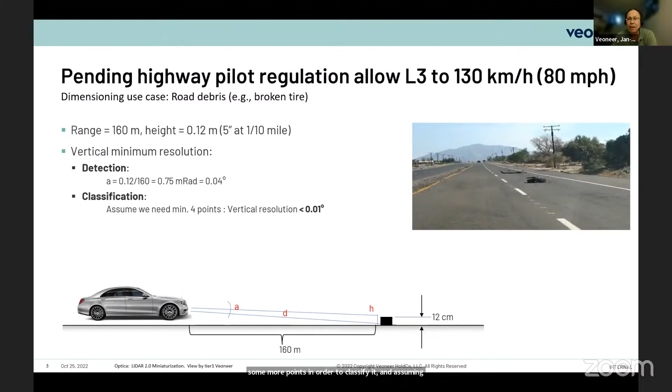Just to compare with what a lot of people are familiar with from the Google car, the early Velodyne has a point separation of 0.9 meters, so you get at most 2 points vertical. This gives some perspective: you need several points on something that is 12 centimeters tall.

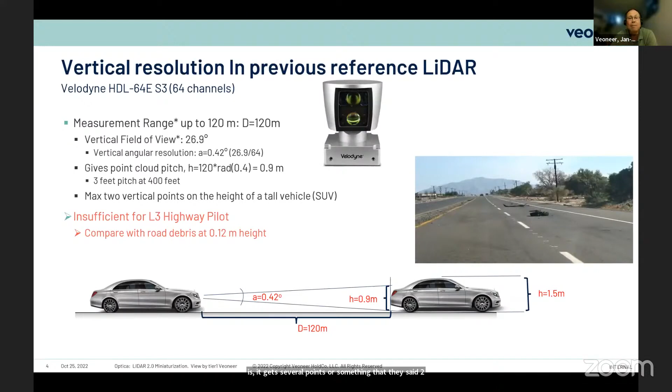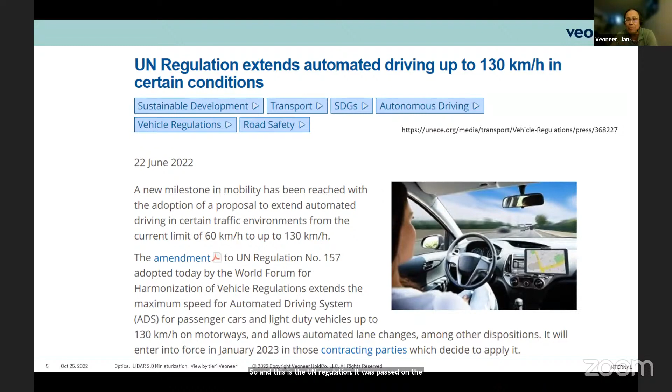This is the UN regulation, passed on the 22nd of June. So if you want to read up more, it actually allows L3 up to 130 kilometers per hour, and I think that gives a lot of the requirements.

The next point is that it also has to work in a lot of different weather conditions, unless we all move to Arizona or other places with very nice weather. This is an example: the left one is driving behind a car on a wet road, and the other is driving behind another car on a snowy road. Rain is usually not the main problem; the problem is the wet road with somebody driving in front of you, but your system has to handle this as well.

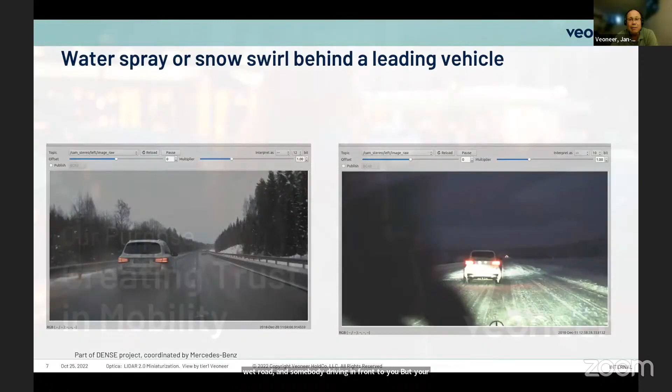This meeting is all about cooperation, so we have a question we ask our guests: what kind of challenges do you have, and what kind of things do you think the rest of the industry here with us today can help you with?

Well, I think that for automotive, the first requirement is cost, the second requirement is cost, and the third requirement is cost, but you always have to fulfill the specifications to solve the problem. You have to be small, use little power, and it has to be possible to package. But unless you fulfill the use case requirements, this automated highway driving is actually a real application coming to cars in the near future, and that means there will be lots of systems requiring these things on the road.

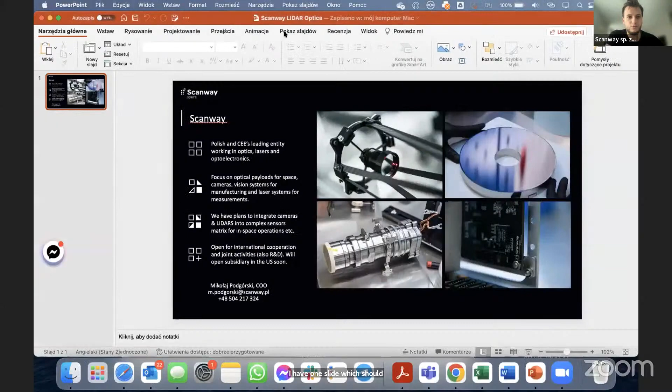Yes, of course, I will share the screen. I have one slide which should clearly say what we are doing and why LiDAR is in our interest. As introduced, my name is Mikołaj, you can call me Nick in English, it might be easier because of the Polish names which are quite complex to pronounce. At Scanway, we are a leading entity in our part of Europe which develops optoelectronic systems for space, and therefore we have lots of interest in LiDAR. Quite recently, you probably all heard about the number of satellites sent to space by Elon Musk and about space debris. We are working right now with our partners to integrate cameras and potentially LiDAR systems into one complex matrix of sensors, which could be used to operate spacecraft and satellites in orbit. So there is a huge market coming for these kinds of systems.

So we are open for any cooperation, for any R&D, not only in space, but also in different, slightly weird areas of industry, like the wind turbine maintenance industry, where we have implemented LiDAR as a quality inspection system of wind turbine blades. So space is one thing, but there is room for LiDARs here in Poland and in Eastern Europe in general.

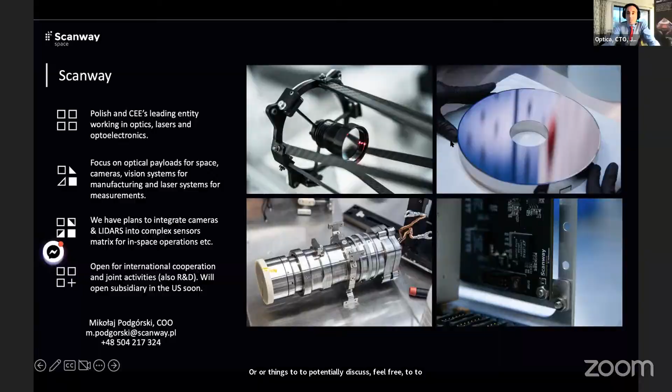Thank you. One thing that I would like to ask the two of you, of course you come from very different market segments. On one hand, we have Veoneer who tell us that the biggest challenge is the cost. Mikołaj, for you, is also the biggest challenge the cost, taking into account that you're going to higher and higher volume production because of the CubeSats?

Well, not necessarily the cost. I would say that the availability of the components right now is the bottleneck, as well as the unstable situation on the markets, which is connected to the geopolitical situation in Europe. It's kind of crazy right now. So both of these aspects will be the key drivers of the company's development in our sector, I guess.

I want to connect these two companies with one other company that means a lot to me, a person that I have been in touch with for many years. This person is from Jabil Optics, Simon Schwaiger. Thank you very much, Simon, for being with us. Jabil Optics, I think all of you know Jabil, one of the largest companies in optomechatronics manufacturing in the world.

Simon, when it comes to LiDAR and hearing the specifications and needs of a company in automotive and a company in space, what do you bring to the table?

Hi, Jose. Nice to meet you here. And you guys, can you hear me? Loud and clear. So I have something I could share, also one slide with you, if that's possible. Yes, please. And while you share it, I would like to remind everyone to please keep your camera on. We really want to see everyone. Emil from Synopsys, great to have you here. All right.

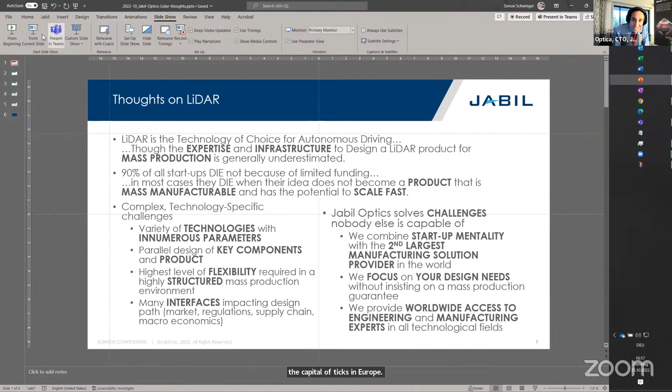Jabil Optics, for those of you who don't know, is in Jena, the capital of optics in Europe. Last week I was in the capital of optics in the US, in Rochester. Can you hear me? Yes, now it's good.

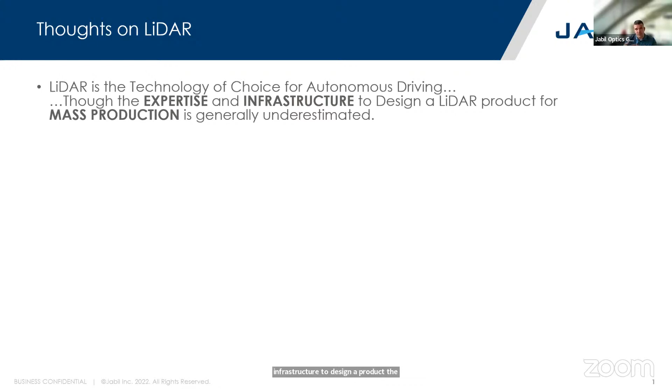All right, so just a few thoughts that we see on LiDAR, and I think we share the view: it's a key technology for autonomous driving. It will be part of the sensor suite enabling this technology. However, what we also see is that the expertise and infrastructure to design a LiDAR product for mass production is underestimated. Why this is the case, I'm going to explain in more detail.

What we also see is that there are a lot of startups involved in this technology, and some already start to fail, and I think there will be more coming. It's not, to our perception, because of limited funding, even though the funding also is sometimes not very substantial. Most of the startups die because they are not capable of coming up with a product that is mass manufacturable and has the potential to scale fast. I think that's also a key topic here.

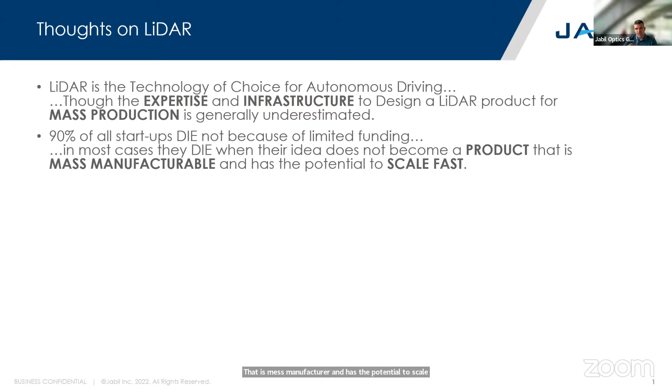And why is that? We tend to say that there are many complex technology-specific challenges. First of all, there are numerous parameters, and the colleague from Veoneer already highlighted some of them, and there are many more, right? Also, a lot of key components are still under development, like MEMS devices that are currently being developed but at the same time being integrated into a LiDAR system. That adds complexity. Plus, during design engineering, you need to maintain a lot of flexibility to adjust to changes throughout the project, and this is very much to the contrary of a highly structured mass production environment.

So this is really a tension that is brought in, and we experience it on a daily basis. Plus the interfaces that have already been mentioned by the colleague from Poland—markets, regulations, supply chain constraints—that adds to the complexity.

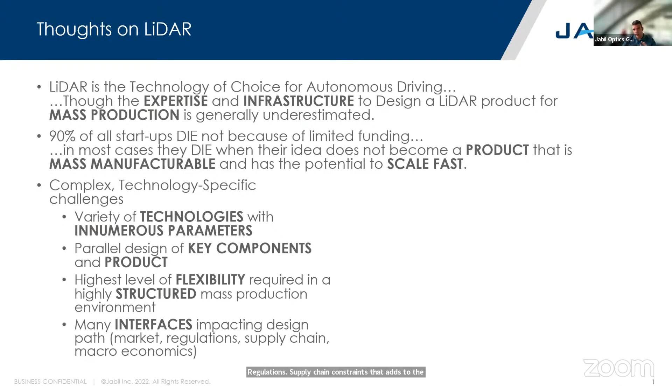And Jose, if you may allow, I think Jabil is in the position to answer these challenges. We have startup mentality. We are the second largest manufacturing provider, 260,000 people, 33 billion in revenue. We focus on design needs. There doesn't need to be an outlook on mass production. We understand it might take a while, but we provide access to engineering and manufacturing experts. We are happy to share and continue to share our thoughts in this call today and afterwards.

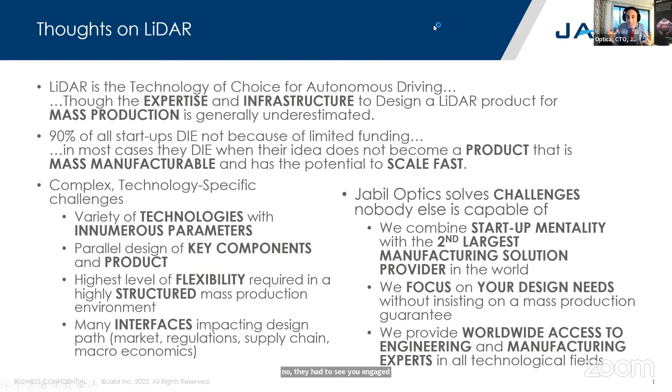Now that I've had you engaged, one of the key questions I want this meeting to try to answer, and I want to go to each of you, Karl-Heinz, Nikolai, and Simon, one after the other: what is the right wavelength that we should target for LiDAR in your particular application? Jan-Erik, Veoneer, what are the current issues with eye safety? What is the recommended wavelength for LiDAR?

Well, there are probably many different opinions about this, but I take the functional hat on here. It has to be eye safe class 1, and it has to fulfill the specifications. If I can do that with, call it, the silicon wavelengths, it's probably cheaper, so that's preferred, but it has to be eye safe and it has to fulfill the specs. I'll outline what I now think is the most relevant dimensioning spec on highway automation. So you won't give me a number, but if you can solve it with a cheaper technology, that's preferred.

Nikolai, where do you stand with wavelength? You are talking about large range LiDAR here, so you don't have a problem with eye safety, but you have a problem with power. Yes, exactly. So there should be a compromise between the power and the range, and basically the quality parameters that we can get from the LiDAR.

In space, as you mentioned, the eyes are not that problematic. We need to be able to have precise measurements up to hundreds of meters, and we don't necessarily have to carry nuclear power on our backpack. So that's very tricky, and that might be the biggest challenge actually, to answer that question and find different solutions, different ideas. For example, we can have a different solution for a small satellite, and a different solution for a bigger satellite, because of the power. So at least for me right now, it's very hard to give you any number. It would be a matter of discussion and some kind of feasibility studies, that's for sure.

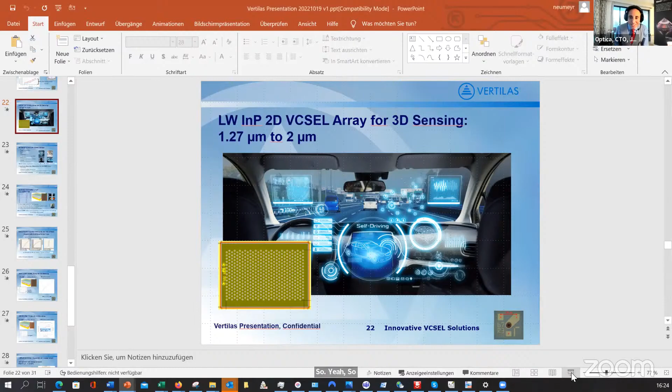So we have a long wavelength VCSEL technology based on indium phosphide. The important part is that we can produce VCSELs from 1.27 micron all the way up to 2 microns. We can do 1.3 micron VCSELs, 1350 nanometer, 1380 nanometer, 1490, 1550, any kind of wavelength. And we have started to produce now 2D VCSEL arrays for 3D sensing and LiDAR applications.

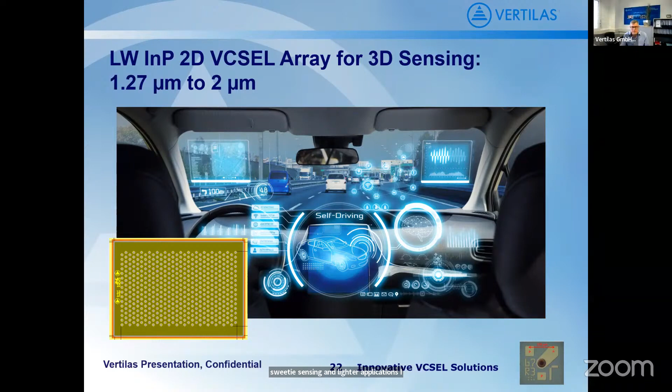I want to show you some examples very quickly. Target applications, you know better than we do. But if you look at the availability of prototypes or 2D array chips we have today, they are at 1.3 micron, starting from a few emitters all the way up to 800 emitters.

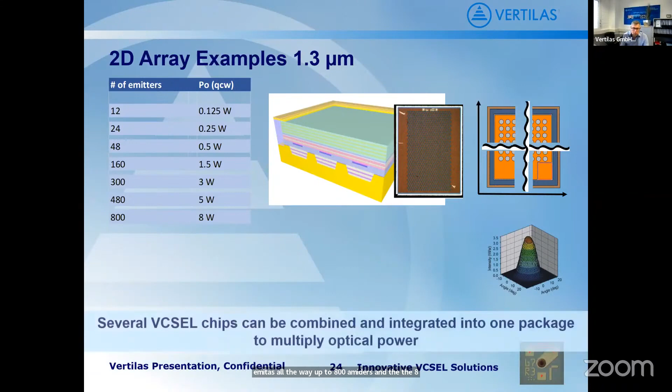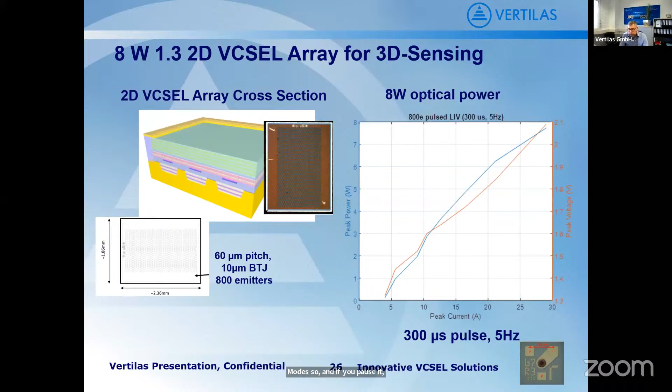And the 800 emitter device produces up to 8 watts in QCW mode, and if you pulse it, you get a multiple of optical power. Another example is a 300 emitter array, which produces about 3 watts of optical power in QCW, and if you pulse it with a 200 nanosecond pulse, you get almost 5 times as much. And if you reduce those pulses even more, you get even more optical power out of it.

As I said, we can do the 1.3 micron, like 1380 nanometer, which is probably the best to work with sunlight interference in open space. But we can have any kind of wavelength between 1.3 and 2 micron, and we can structure from a few milliwatts up to tens of watts of optical power integrated on one chip. And if you need even more power, you can integrate even more emitters on one chip, or integrate several VCSEL chips in one package.

You get 14 watts of power at 1.3 microns? Yeah, and this is only a 300 emitter device. The other one is an 800 emitter, which has about 8 or almost 10 watts peak power at QCW, and with a 200 nanosecond pulse you get like 30 to 40 watts in that range.

This has resonated with two people in the room. First, Sabir from Patience Consulting. Sabir, thank you very much for being with us today. What's on your mind? Yeah, I think this is great. I think TRUMPF also released some information recently about indium phosphide, long wavelength VCSELs.

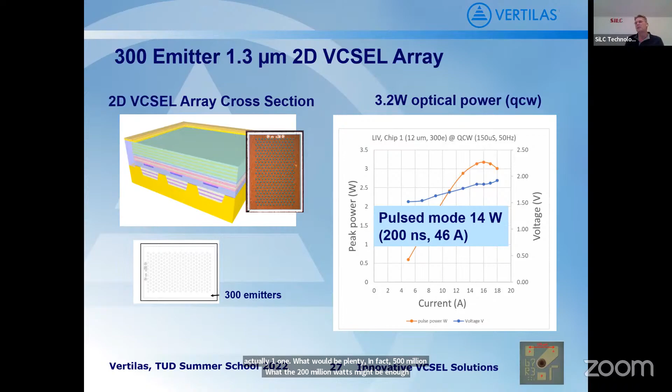Let me see if I can share. Ralph, please go ahead and share the screen. Yes, all right, thanks for having me here.

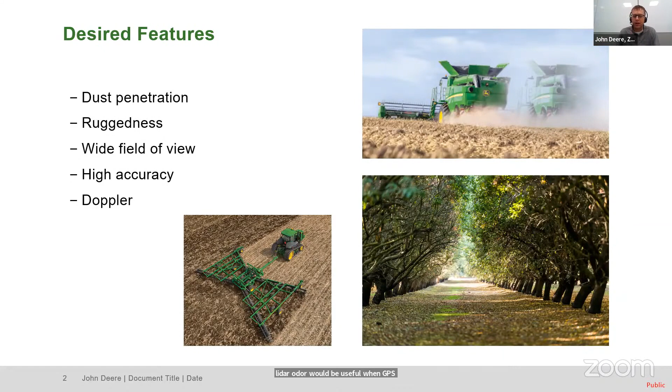Rightfully so, the industry is very focused on the automotive application due to the high volumes. Certainly our volumes are not automotive, but neither are our requirements. So a lot of companies come at us with an automotive pitch, but I'd invite people to stop and think about our environment and our equipment.

Top speed for our equipment is 50 kilometers per hour on the road, and that's not really where our need is—we're not trying to deliver autonomy on the road for ag equipment. It's in the field where our top speed is maybe 25 kilometers per hour. And related to our need for not high speeds, but low speeds, we don't need the highest resolution either.

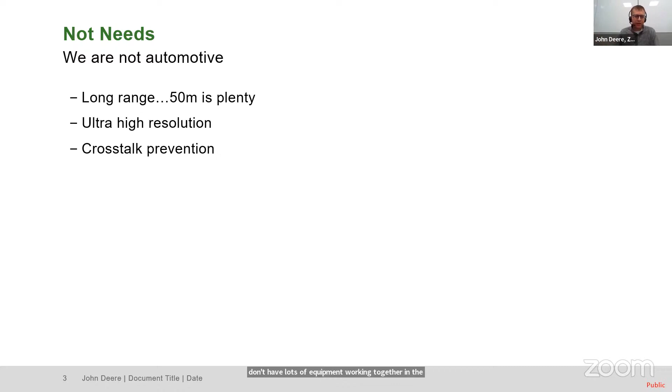From a crosstalk perspective, we don't have lots of equipment working together in the field in concert. And if crosstalk events do happen, the worst thing that could happen is the vehicle would stop, resulting in a small productivity loss. But I think the chances of having a crosstalk incident are pretty slim.

One other thing I'll say is we've got a history of testing LiDARs and other sensors in dust chambers. What we found is that not all LiDARs are created equal, even at that 900 nanometer wavelength. However, we've never experienced a LiDAR that outperformed even a passive camera in a dust chamber. But we haven't given up hope.

In fact, we've invested in the construction of an indoor dust chamber that we plan to have commissioned by the end of the year. So if you're a LiDAR vendor out there interested in serving our needs in the agricultural space, we'd invite you to come in and test with us at our facility in Fargo, North Dakota. Anyway, that's all I've got, Jose.

Thank you very much, I'm really excited about this dust testing that you do. Is this something—when it comes to a LiDAR, I think the most difficult thing is how it would resist not only the light going through the dust, but also the dirt accumulating in the optics. What is the limiting factor of dust in a LiDAR environment?

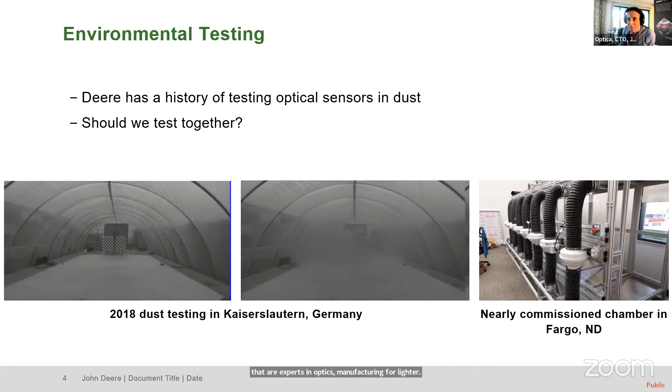Okay, so I have a couple of companies here in the room that are experts in optics manufacturing for LiDAR, so I want to give them the floor. But first I see that Ralph Munster has unmuted his microphone, so maybe he wants to add a comment to this.

No, I apologize, it wasn't intentional, but I certainly have a comment to that. What we missed with coherent is that coherent sensing has the capability to go through dust. There are some nice studies done by Bridge in the past for the Army, where helicopters land in the desert, and when they blow up all that sand there's no visibility, but they've shown you can actually look through the dust with coherent sensing. Just a comment that might be interesting to try out—we've tried it out and seen through smoke and dust pretty well.

I do recommend the use of FMCW LiDAR when it's very dusty, because it's not limited by power, and that is something that helps reject the scattering of light in the dust, Ralph.

Yes, indeed. We have a question in the room coming from a company that is expert in integrated photonics with 3D sensing applications. That company is Anello Photonics. Thank you very much for being with us. Tell us, what's on your mind?

I think we may have lost him. He raised the hand and then he was going out. It's a pity because they do 3D sensing.

Okay, let's go back. I'm sure he will reconnect, but I really have a couple of comments for you, Zach. We really see that there is a need for optics in the LiDAR regime. So I have two companies, one in micro optics and one in larger optics, and I want to see if there is a match with the unmet needs. Let's start with the micro optics.

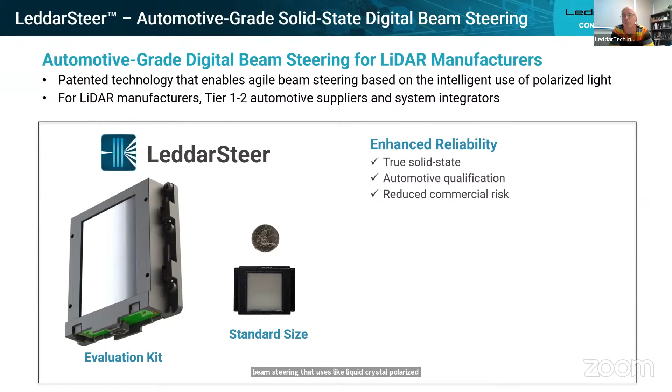What we call our LeddarSteer technology is really automotive grade digital beam steering that uses liquid crystal polarization gratings to provide highly reliable automotive qualified steering. I'm not going to go through this in detail, but the gist is we provide software controlled dynamic beam steering. Importantly, this is compatible with both direct and coherent LiDAR, and can be made in 905 nanometer or 1550. Anybody interested in learning more, just reach out to me.

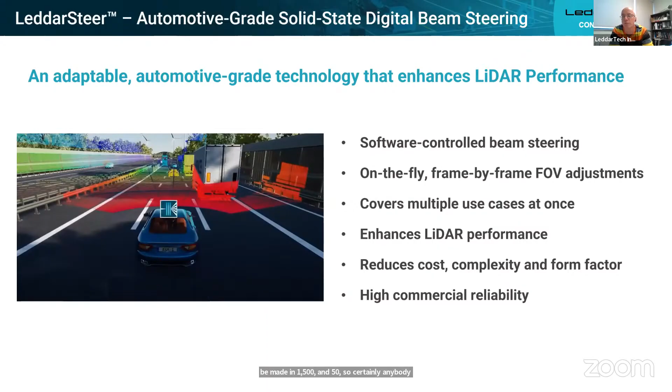One of the companies I'd like you to meet is Castor Optics. Do we have anybody from Castor Optics in the room? I think we have Kathy Baudet with us. Hi Kathy, good morning. Good morning to you too.

Kathy, I met some of your colleagues in Rochester last week, and we discussed your double-clad fiber and how this could be an interesting approach for low-cost LiDAR solutions. Could you tell us a bit about this?

Yes, so we developed a double-clad fiber coupler a few years ago, and it has been used a lot in biomedical imaging, but we're trying to branch out, and LiDAR is definitely an application we're looking into. So we're quite newbies in the field, actually. But what the coupler does is that it couples a single mode signal with a multi-mode signal.

So the coupler for the single mode part acts as a null coupler, so the signal goes very efficiently from one port to the other. And what it can do, it can actually collect the signal back from a reflector, whatever that is, a vehicle or passenger. Then we can collect it quite efficiently with the multi-mode cladding surrounding the single mode core. And then the coupler will extract that multi-mode signal very efficiently to another port, so we can decouple the illumination from the collection of the signal.

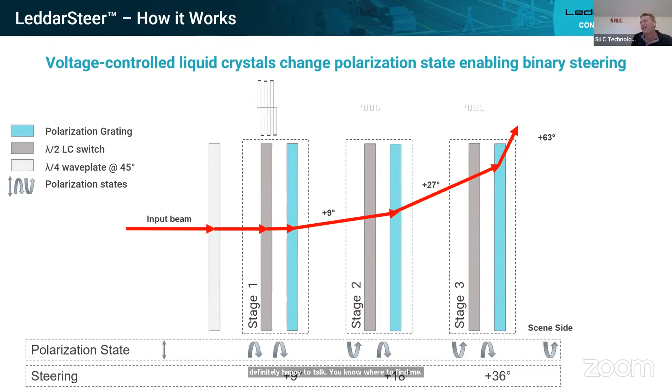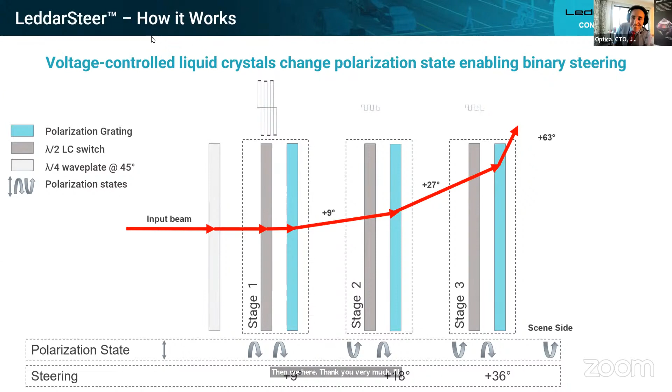Fantastic, Ralph. I contacted you yesterday for this event. It was worth it being here. Thank you very much. And before I go to the speaker, I want to give the floor to a very good friend coming all the way from Canada, Alain, consultant from Optica Inc. Thank you for being there.

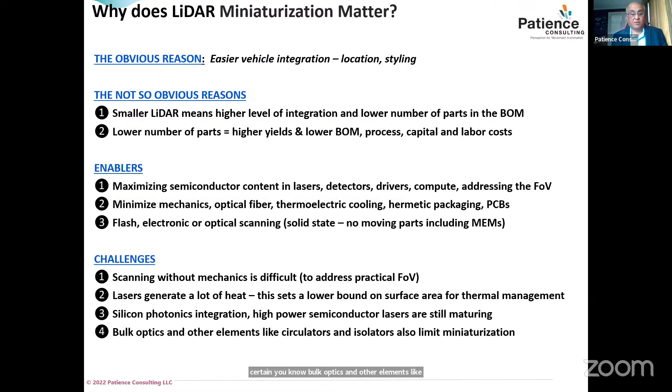There was a lot of discussion about eye safety, and wavelengths always matter. In my experience, the wavelength is one of the very emotional subjects when LiDAR is discussed. You've got people who are passionate about one wavelength over the other. I know in my past life, I was very passionate about 15xx nanometer LiDAR.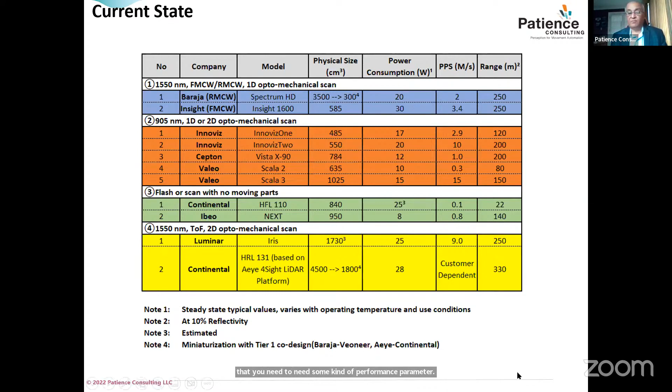The first one is Christian Neumeyer from Vertilas. Christian, I see your hand is up. What's on your mind?

No, I apologize, we got the long wavelength VCSELs, and we're doing 1550 nanometer for a couple of applications. Now, actually, in this first step for 2D arrays, we have focused on 1.3 micron, like 1380, 1350 nanometer, for special regions or for the demand we get from customers. But as I said, we've done 2D VCSEL arrays with 1,000 emitters on one chip already a couple of years ago. And as we do it for 1.3 micron, we can just do it for 1550 nanometer based on any requirements. So if there's anyone in the room, like Pierre from LiDAR or anyone interested in 1550 or other long wavelength VCSELs, please contact me, and I can tell you what our technology can do.

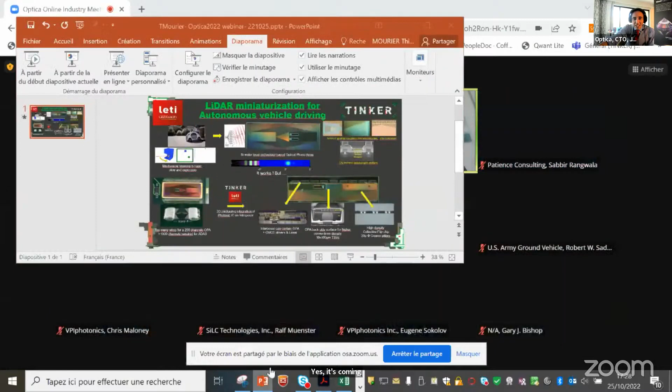Let me share my screen. At the bottom of the Zoom window, there is a green arrow, share screen, and then very important, select the screen that you want to share with us. Yeah, yes, it's coming. Okay, oh sorry, I was too fast.

Okay, do you see my screen? Yes, okay. So I'm Thierry Mourier from CEA Leti.

We are a technological RTO working on photonic developments, and we are involved in the Tinker project to work on the miniaturization of LiDAR for autonomous vehicle driving, to get away from mechanical steering devices, which are huge, slow and expensive.

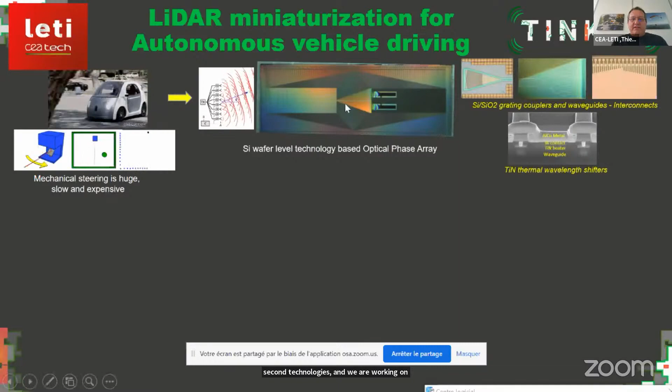The technology moves toward steering devices named OPA, optical phase array, based on CMOS compatible silicon technologies. We are working on this technology by generating the steering through heating.

Here you can see an emission/reception 256 channel optical phase array, with the different devices embedded: silicon oxide, grating couplers and waveguides, all the interconnects, and as you see in the pictures below, the TiN heater that will generate the wavelength shifting.

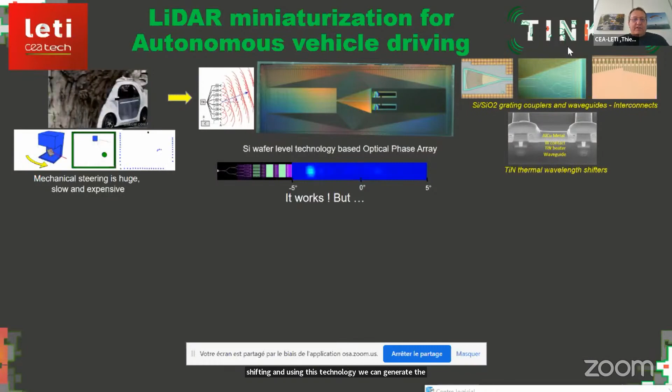Using this technology, we can generate beam steering at 20 kilohertz to make the LiDAR. However, the big difficulty is that autonomous vehicle driving will require a lot of antennas and a lot of channels to fulfill the requirements in terms of beam accuracy. As mentioned in this picture, using conventional technologies, you would have to embed typically more than 500 wire bonds, which becomes quite critical from a manufacturing perspective.

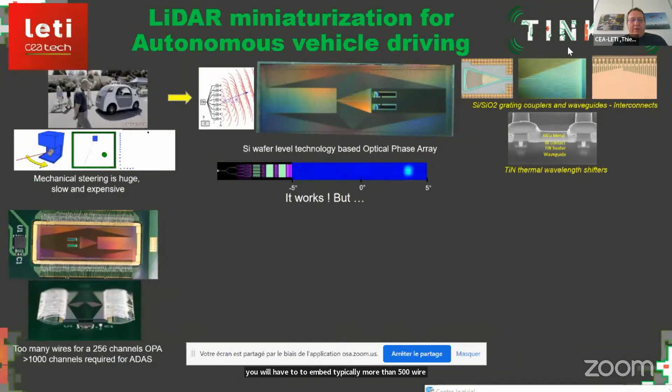So in the Tinker project, we are working on adapting 3D packaging technologies already developed for conventional electronics to photonic ICs, through attachment of the OPA on a silicon interposer. As you can see in this picture, the emitting OPA is on a test silicon interposer, and we can imagine the interposer not only for testing, but we can also add CMOS common devices on it, and eventually, when ready, the lasers to be coupled with this OPA.

For that, we work on different technologies. The first is to develop the interposer and all the features on it. The second way is to integrate the TSV concept to move all the connections from the edge and front side of the OPA toward the back side and the surface, which can drastically reduce the footprint of this device.

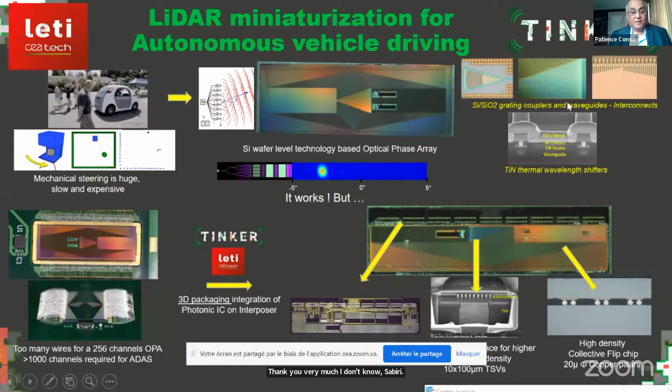Thank you very much. Sabbir, do you have any questions or comments? Yeah, quick question: the thermal wavelength shifters are typically quite slow, right? So how are you able to address large fields of view at a high frequency?

Yes, it looks slow, but that's just because it was probing on a probe station. Typically, the performance we have in steering is we can do 2 Pi at 20 kilohertz. Sorry, could you tell me again, what field of view are you addressing? How many points are you doing per second? How many points can you scan per second?

In fact, we do the 256 channels, moving from 0 to 2 Pi scanning in 50 microseconds.

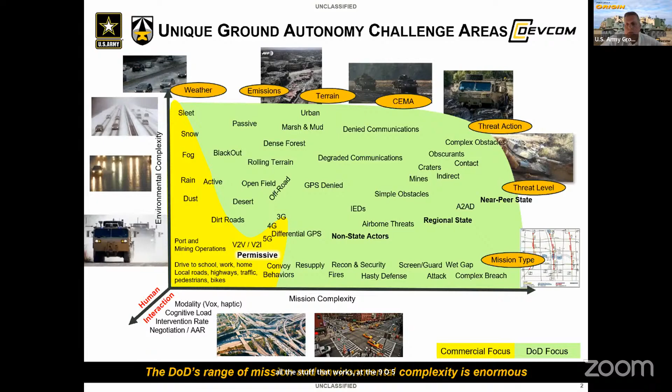So let me jump ahead a little bit and say, what are my desired ground LiDAR characteristics and challenges? I was really loving the conversation you all were having about wavelength. The Army likes to fight at night, and having a sensor that lights you up like a Christmas tree and flashes at 10 hertz is basically saying, here I am, come find me.

So our customer, the warfighter out there, really wants something that's beyond the silicon band. They don't know what that means technically, but I tell them, hey, you got to get past 1100 nanometers, predominantly because even the low light silicon sensors with an IR filter can pick up the LiDAR quite easily. So it doesn't mean I have to punt totally on LiDAR, but all the work being done at 1.3, 1.55 microns, and so on, is very interesting to us.

You kind of heard John Deere allude to this already - our worst enemy, and you can see the video running there, is we make our own dust clouds. A lot of times when you're doing cross-country off-road maneuvers, or you're actually on secondary and tertiary roads - predominantly tertiary roads - they're dirt. We make our own dust, and we live in our own dust, and it's not really good. You have to work through it, so clearly the longer wavelengths help there as well.

The other problem we have, and you heard John Deere talk about this too, is we have to deal with extreme environments, some with high shock values. We're looking for solid-state sort of devices, or even MEMS, I think would be fine in terms of being able to steer.

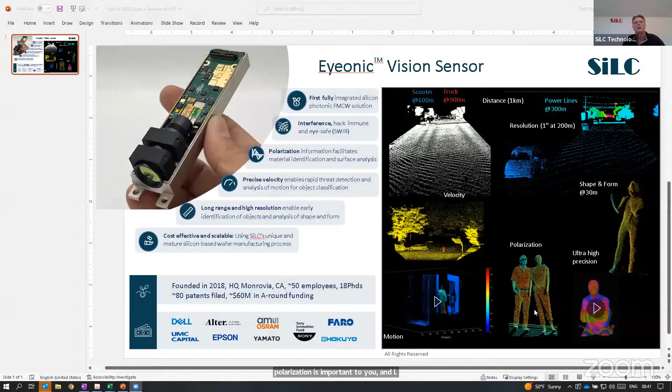The SiLC coherent LiDAR is also giving you the polarization intensity back. So what we do is we send out linearly polarized light, and then on the return back, we can give you both polarization intensities back. What that does is, when you mention steel, fences, and rods, it's actually really good at detecting metal, or in this case here, I'm standing next to a mannequin, detecting human skin versus non-human skin, here's plastic or other kinds of surfaces and materials.

So I think that's quite unique. In terms of the big picture, most of the sensors today just look at the photon intensity as they come back. With our approach, we actually dissect the photon itself and look at its wavelength, polarization change, phase change. So it gives a lot more information back, like instantaneous velocity, which is the Doppler shift, or information about the material. So maybe we should connect, I think that could be a good thing for your ground vehicles.

No, appreciate it. I actually wrote down your company's name after you gave your little talk.

We are definitely interested also in the ground plane buried objects, like mines and IEDs, which actually show up very well in cross polarization. It would be great to get that out of a LiDAR versus having to do that specifically with some large EO systems.